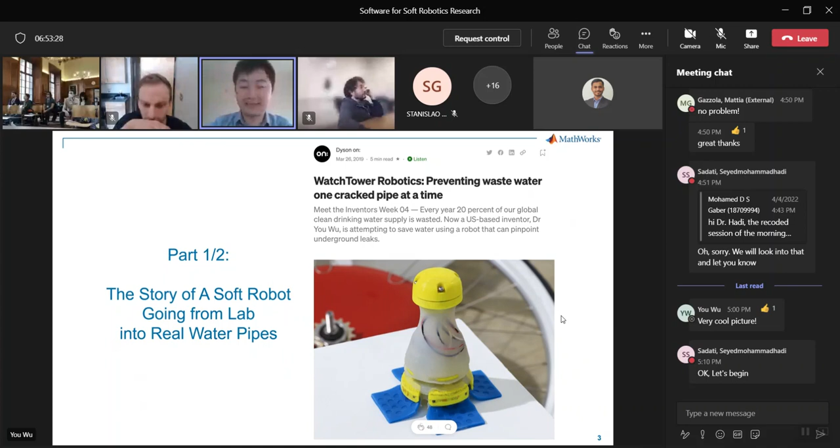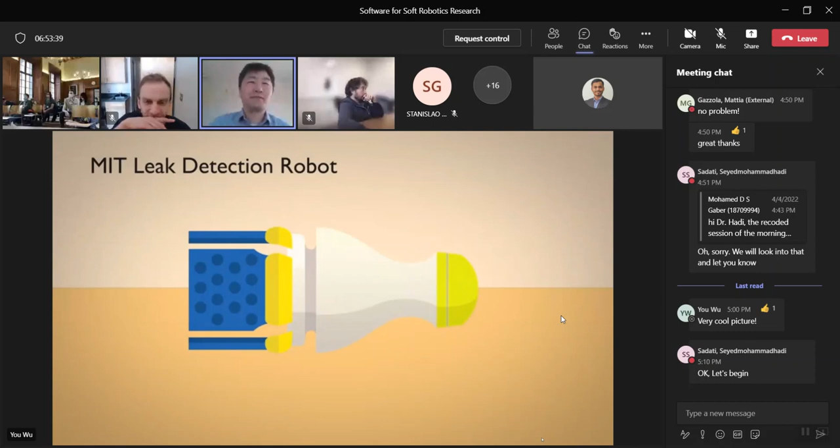I'll reuse one of my old conceptual videos to show how it works. This tiny robot has blue membranes we call membrane sensors, or flappers. They stretch and detect deformation whenever pulled by a leak in the pipe, connected with a flexible support to the rubbery body that has all the electronics. It's completely wireless, untethered, and it can bend to go around pipe bends.

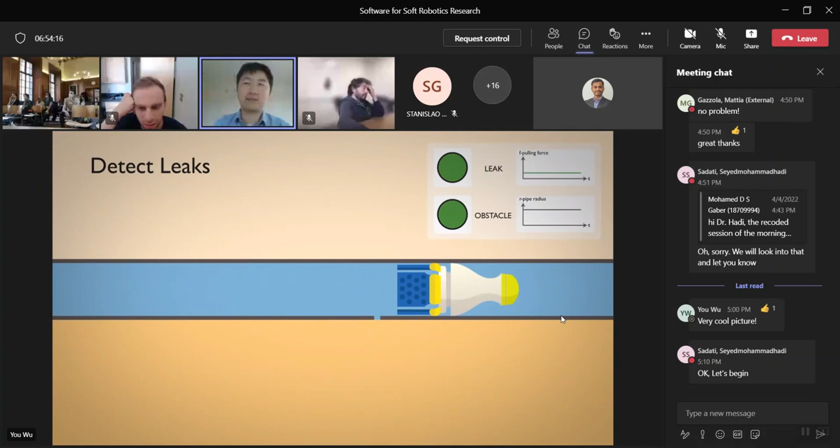When flowing in the water under pressure, whenever the blue membrane passes a leak, a suction force pulls on the membrane, and by detecting that deformation we know if it's a leak or not. Often there are other things in the pipe like dirt and bumps, so we design ways to detect those too, since they put friction or drag force on it, but the direction of deformation is different.

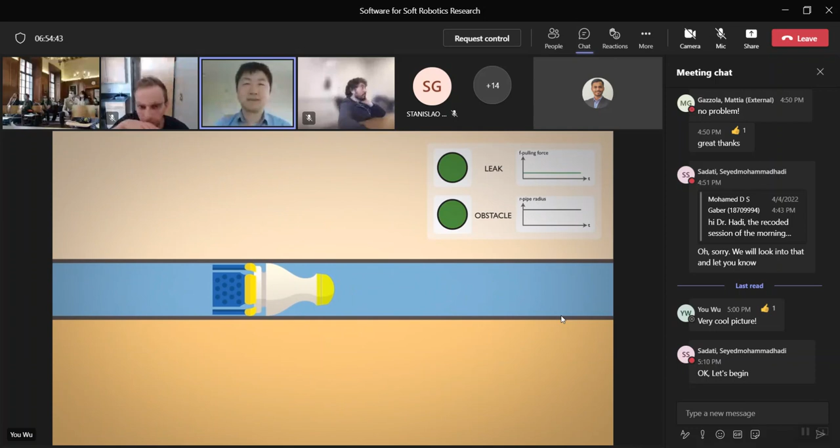So this is the robot, and when we actually use it in the field, we put it into the underground water pipes through hydrants. In real operation, we take apart the hydrant, drop the robot into the pipe, then connect the water hose so it pushes water through, and the robot moves through the pipe, performing detection along the way until it reaches the other end, another hydrant, and comes out.

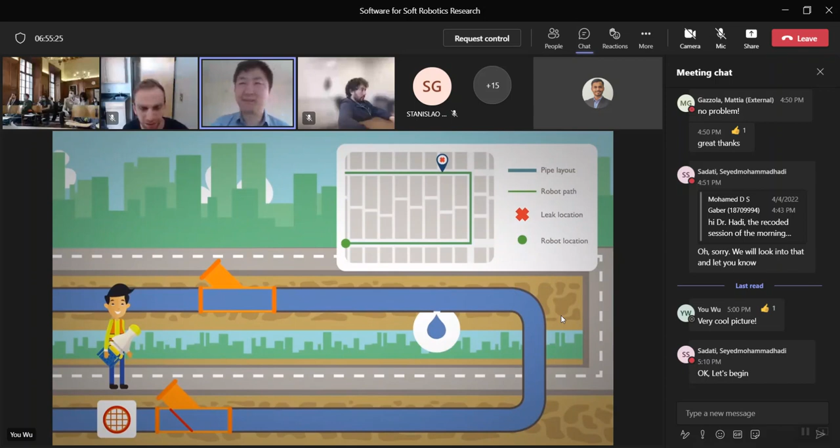Then we download all the data from the robot and put it into what we call a Google Map for leaks. It looks pretty easy on the video, but in reality there was a lot of work to get the robot in and out of pipes. You probably don't expect that when working in the lab, but once we take it to the real water system, it is pretty hard.

So let me go to the next slide. Right.

So when I was in graduate school, that's the tiny robot I built, and I'm part of the Mechatronics Research Lab group at MIT. This lab has a long history of building robots with rubber material. We were building robot fish, robot stingrays in the past, and then we found this very unique application where we can build soft robots for pipeline inspection. Actually, it does some real good for the world.

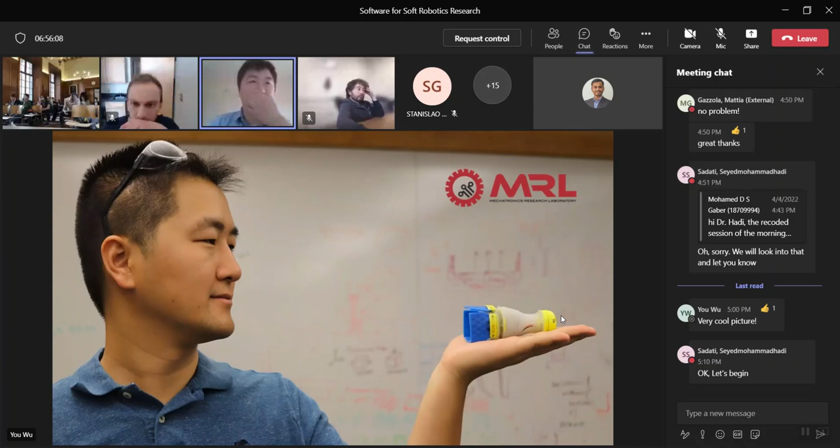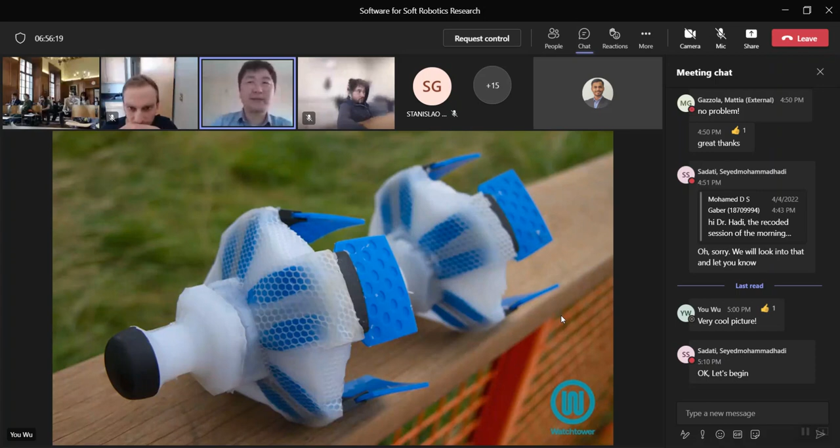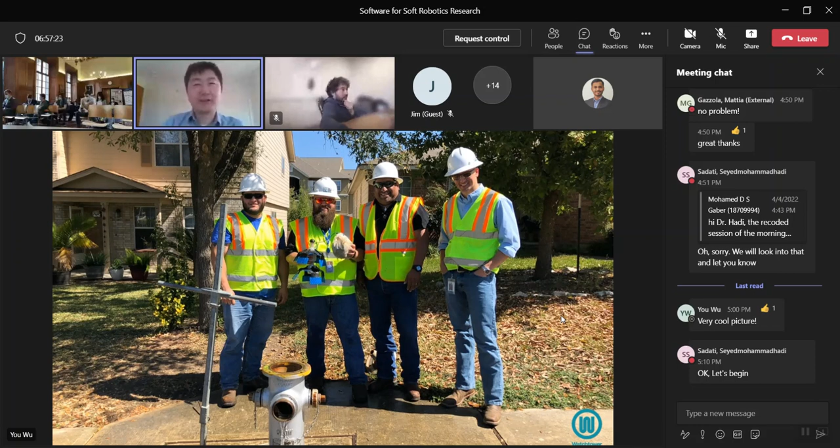But as you know, in the business world, it's not just about engineering. There's a lot more to it. We actually ran out of money after 2 years of operation. Today, rather than talk about a lot of things that worked and didn't work in a startup, I really want to share the things I wish I knew before I got into the startup space.

And very particular to this conference, this workshop, and everyone here who is interested in simulation software, I want to share how I think about it after reflecting on my failures, and how to use Simulink in a robotic startup. So let me first show you one thing.

So then you would think, how do you address this? How do you do more, faster? Definitely go hire people. What if you hire 3 times more people? And that's what we did. At one point in time we had 9 engineers, and later 11 engineers, reporting to me. I hoped that by growing the team size, I could start to do things in parallel. As new projects came in, while I was working on one project, I could have trained other engineers to carry out the other projects in parallel, so that I don't become the bottleneck holding everyone back.

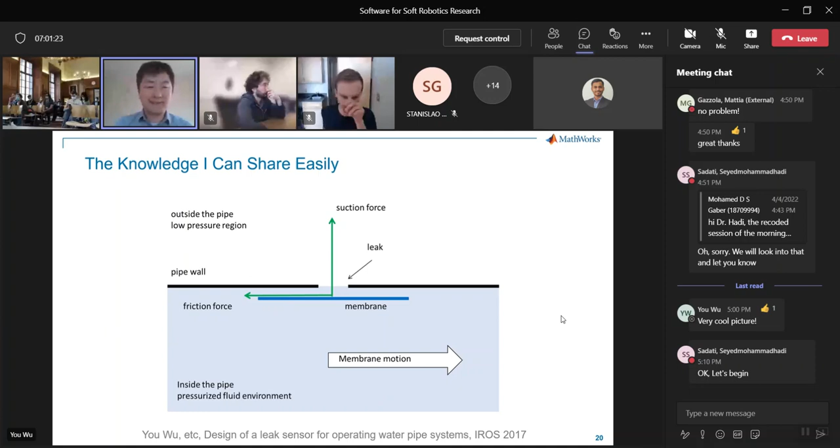But what's really difficult for me to teach others or train other engineers to do is how you actually figure out the location, how you do all the sensor fusion and localization to figure out the XYZ position of where you detect leaks, how the system responds to false alarms like bumps on the pipe, and how turbulent water flow at high robot speed affects the performance of the whole leak detection system.

Those are the things I know, and I try to explain them every time we hire someone new. But essentially, this knowledge, like things you learn over four years of a PhD program, doesn't really translate to someone else in one day. It takes a lot longer and a lot of experience.

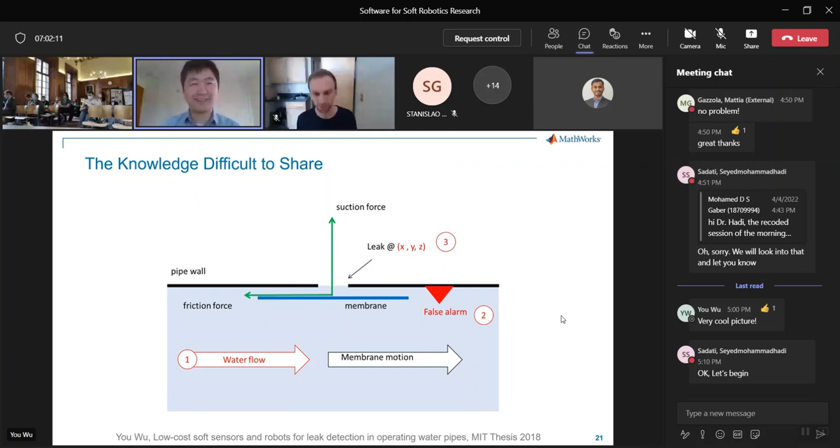That's when I realized we had to build simulations. I had to turn whatever I know into a model and simulation, so that other engineers who join our team can use this simulation as a way to access my personal knowledge. In this way, I'm essentially putting a digital twin of myself next to every other engineer we hire, and that turns the whole situation around.

Rather than everyone coming to me for help when they have a problem, now they're still solving the problem with me in parallel, leveraging the simulation as the way I convey our institutional knowledge.

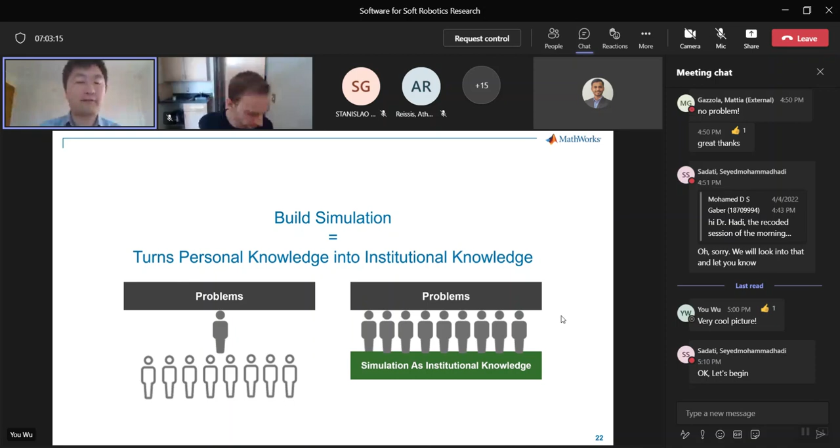I really encourage all of you to think this way: the work you're doing now, everything you learn, you should translate into a simulation. Rather than focus on training other team members to do what you can do, show them your simulation as a way to convey your personal knowledge into institutional knowledge, so you can build a very effective engineering team. Also, simulation is not a one-shot thing, which is the mistake I made.

When I was doing my PhD program, I did a lot of computational fluid dynamics simulation, different simulations to figure out how the system would respond to different flow speeds and so on. But then when I got into the startup space, I thought, okay, I'm done with simulation.

I figured I'd just keep making things and learning from all the deployments, what didn't work, and put that knowledge back into making the next version. I stopped doing simulation when I got into the startup, which, looking back now, was completely wrong.

You should really think about simulation as a tool, a carrier that helps you accumulate knowledge. In every single project, you don't get everything working on the first shot. You design, you build, you test, and then you deploy into the customer's site or system, and you see what worked and what didn't. You need to carry all that feedback and knowledge back into your design again, and repeat this whole process in a figure-8 loop.

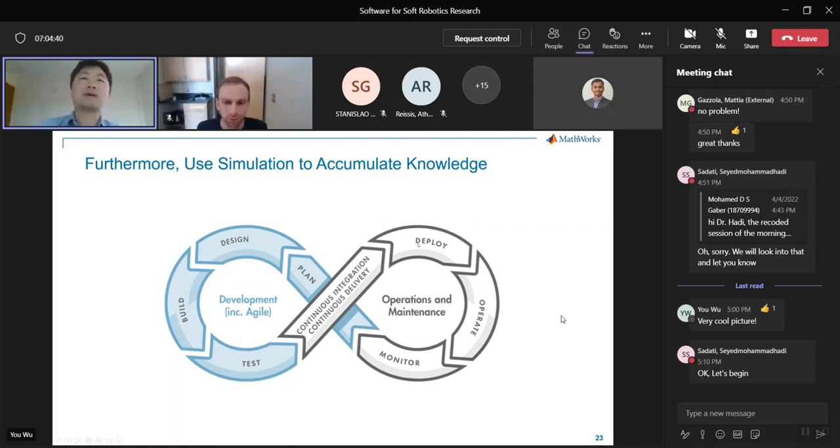This figure 8 loop usually comes from the software development process, but I think it applies equally well in all the hardware development we may do. Simulation should really be the tool that carries all the feedback into your next cycle of design and also help you in the test process.

Now it comes to what I really like about MathWorks and the tools they produce, like MATLAB and Simulink. We really provide software to help you turn your knowledge into institutional knowledge. At MathWorks, we call modeling and simulation part of the model-based design approach, where you use a model and a simulation system to carry your own personal knowledge throughout the design process, and also make the whole design modular so you can continuously add new information, things you learn from the field, things you learn from the experiment, and improve your model. You use the simulation every time you make design changes.

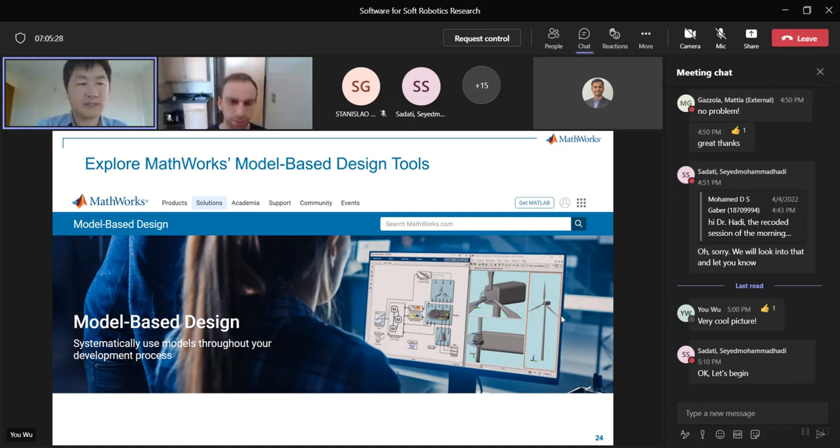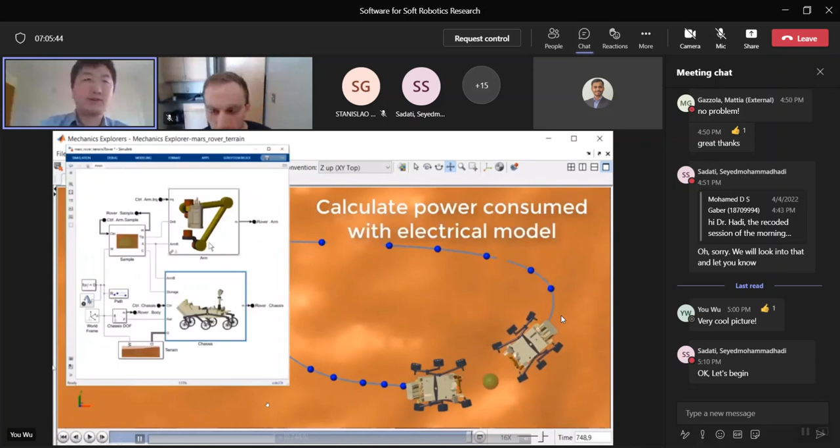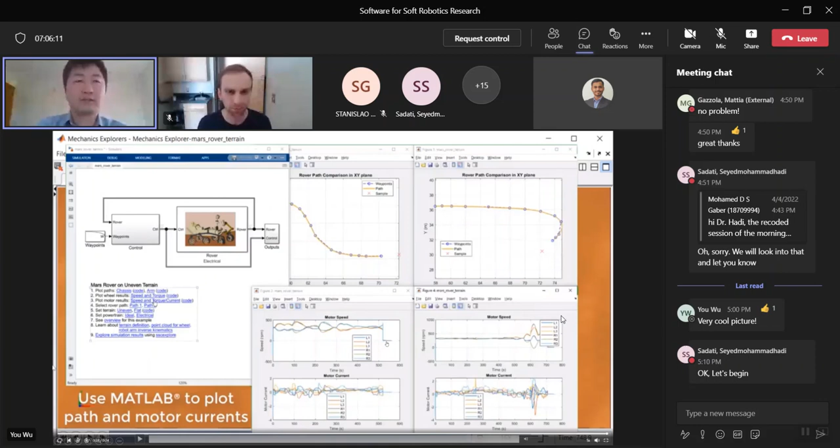For example, this is a Mars rover simulation we demonstrated, where you can model the whole vehicle with all the different electromechanical systems in it, and then put it into the simulation environment to see how it runs across a field. You can monitor all the different current, power, and speed performance along this trajectory from your robot. This type of simulation really enables a team of engineers, more than just yourself, to do things in parallel and track different aspects of design you're trying to improve.

Furthermore, we also introduced something called the digital thread. It's part of the Simulink system toolbox, where you can implement digital threads and track all your design requirements. Every time you or a teammate make a change to one part of your system, you can run your simulation again with one button and see how that change affects the other parts of the system, and whether your system still meets the design requirements you're trying to achieve. For example, if you're tracking speed and you make a change to the mechanics of a robot, you might realize you can no longer meet your speed requirements. Tools like this will be a great augmentation to whatever you're doing in your projects.

Last but not least, a lot of times people ask: as we're graduating, we won't have access to MATLAB through our campus license, so what do we do? We have MATLAB Simulink for startups, and the price is actually pretty affordable, about $1,000 to $3,000. You can get access to all these tools that enable you to do model-based design, scale up your team, and carry your personal knowledge into institutional knowledge with this kind of tool supporting you.

I didn't do everything in the startup myself, or anything else in my life all by myself. I always get mentors and advisors to help me in the process. To me, this is almost like simulating life. You're not just simulating a robot or any project you do, you're taking other people's knowledge to help you understand what you may run into in life decisions, job projects, and others.